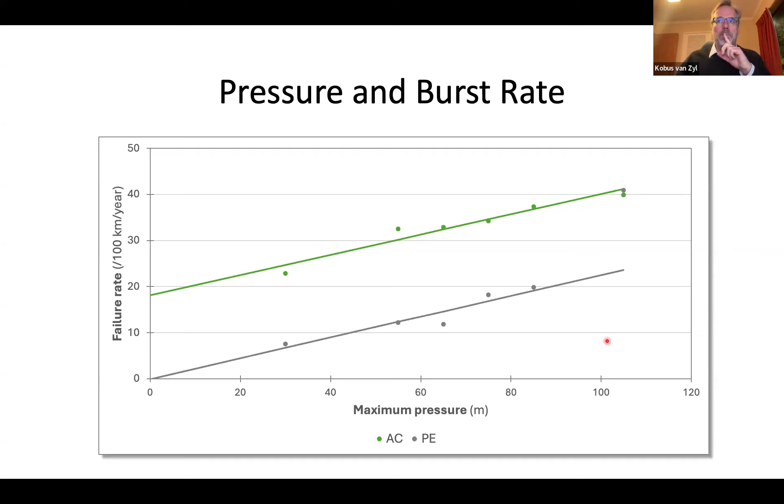Now, the behavior when you do pressure management is somewhat different. And this is Allan's model for pressure management. And this is the model described there. It says that you've got pressure independent bursts that you have to subtract. And then there's pressure dependent burst, and those burst as a function of the pressure to the power 3. So cubic function of pressure, very strong function of pressure.

And so if we take for instance, the AC relationship for Auckland there, and we say, let's start with a pressure of 110 meters there, or 100 meters, and we have a burst rate of 40 failures per 100 kilometers per year. And then we reduce that pressure to 50 meters. If it's a steady state, the burst rate would drop to 30 failures per 100 kilometers per year. But if it's a pressure managed zone, according to the model, the burst rate will drop to about 20 failures per 100 kilometers a year.

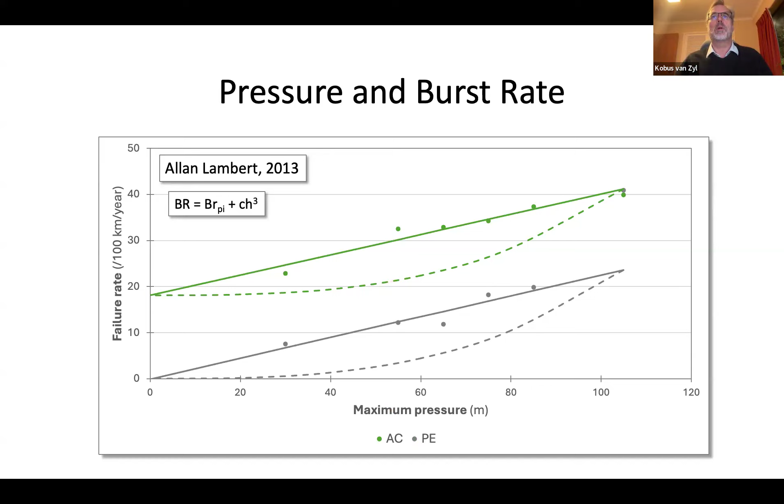And the question that we started this exploration of is, why does that difference? What causes this not to be the same? I'm going to try and give a part answer through the work that we've done.

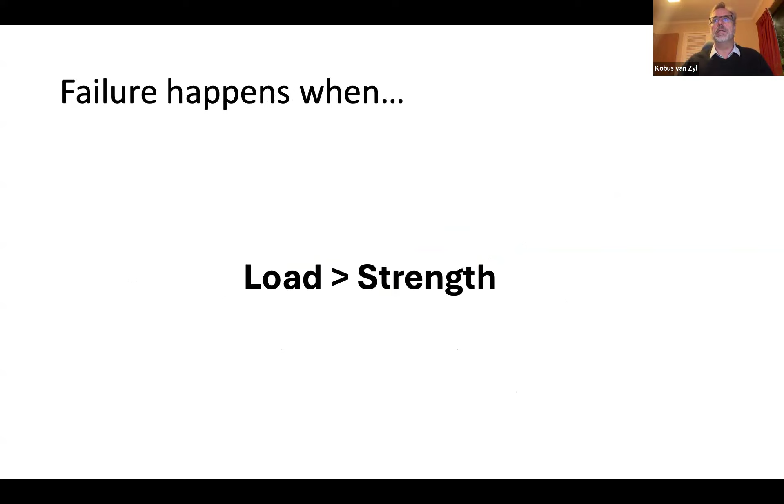So first, I'm going to talk about how failures happen. So failure happens in any structure, like a pipe, when the load exceeds the strength. The load on a pipe can be external, and there are various external loads, but there's also, of course, the internal load, which is mainly pressure, and it's the combination of the two that will give the maximum load at any point.

The strength of a pipe is, firstly, not the same everywhere. So the pipe's not going to fail over the average length, it's going to fail at the weakest point. So that's what we're interested in.

And the second thing is that the pipe deteriorates over time, so the strength will reduce over time. So the loads vary, but also the strength deteriorates over time. So we're trying to understand those processes.

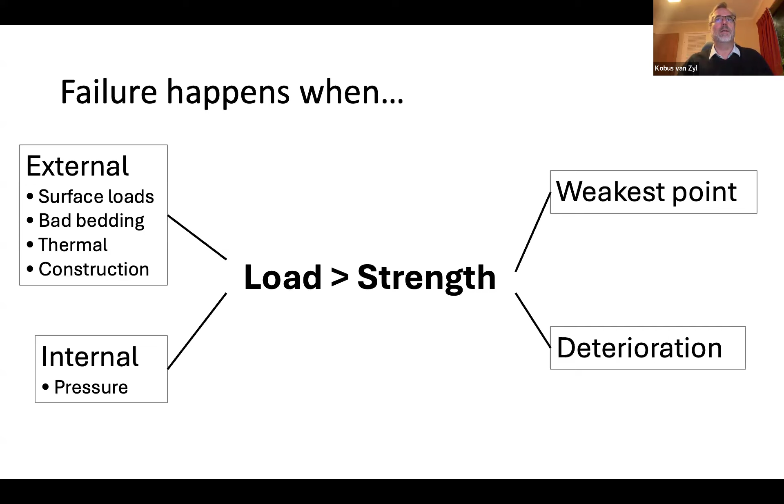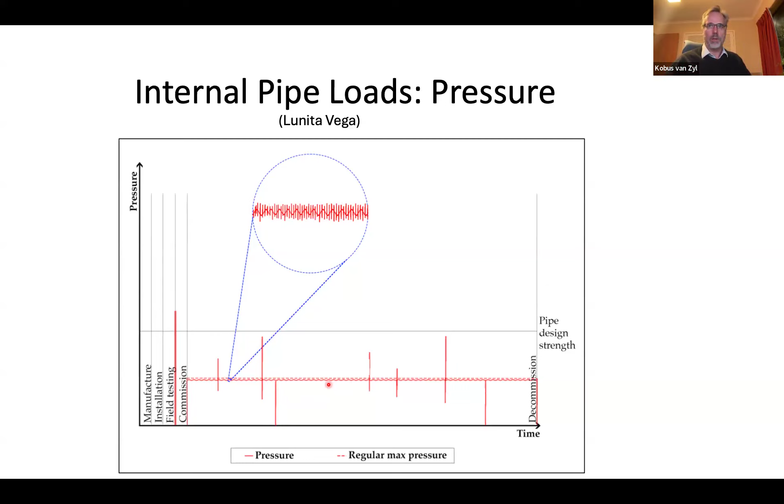Just look at the internal pipe loads, and that's pressure. This diagram shows over the life of a pipe that you've got variations. There's field testing initially that's quite high pressure, and then you've got seasonal variations, diurnal variations, background pressure fluctuations, transient noise, and big transients as well. And you've got periods where you empty the pipe, reduce the pressure to zero, maybe for repairs. So these are the loads that a pipe is subjected to internally, and it varies.

If we look at the pipe strength, this diagram represents, if you take all the points on the outside of a pipe, you'd expect a normal distribution for the strength. But this indicates that there may be a couple of points on the pipe that are weaker than general, and that may be because there's a manufacturing defect or it's been damaged during construction. This is important because this is where the pipe's going to fail when you pressurize it.

So we have weak points on the pipe, and then we have deterioration mechanisms that disproportionately work on these weak points because they already have more surface area. Maybe there's stress intensification happening. So we've got the weak point, and then deterioration at some point over time.

The weak point will start to leak, it'll breach the wall, and then we have what we call a background leak. It's leaking, but it's too small to be detected. That background leak will continue to deteriorate and grow until we get to about 250 liters an hour, which I'm calling a potentially discoverable leak. So the leak is now big enough that you can discover it if you go and look for it, but you don't necessarily look for it at the time. So it's going to continue to grow until it becomes discoverable, and then it's discovered - it becomes obvious that there's a leak from pressure or water appearing above the surface.

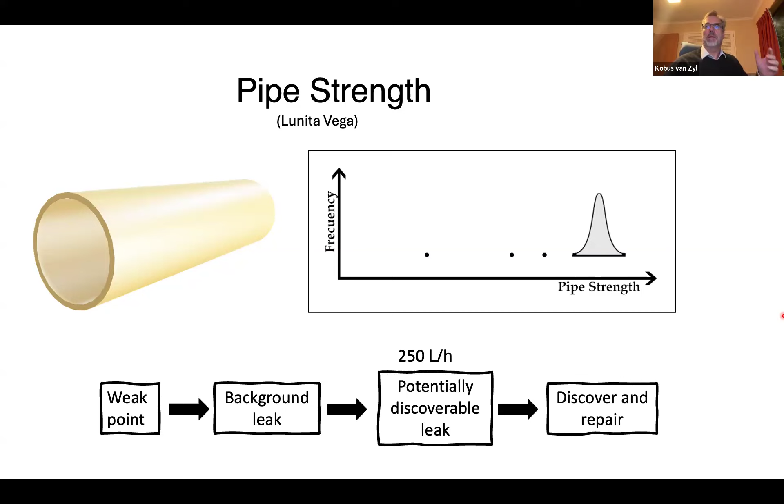So there are two aspects that I want to talk about. One is the deterioration mechanisms - I want to explain and show what they are. The other is the leakage flow rate, because the flow rate is one of the main mechanisms that makes a leak discoverable. And I'm particularly interested in how pressure affects the deterioration and failure flow rate of pipes.

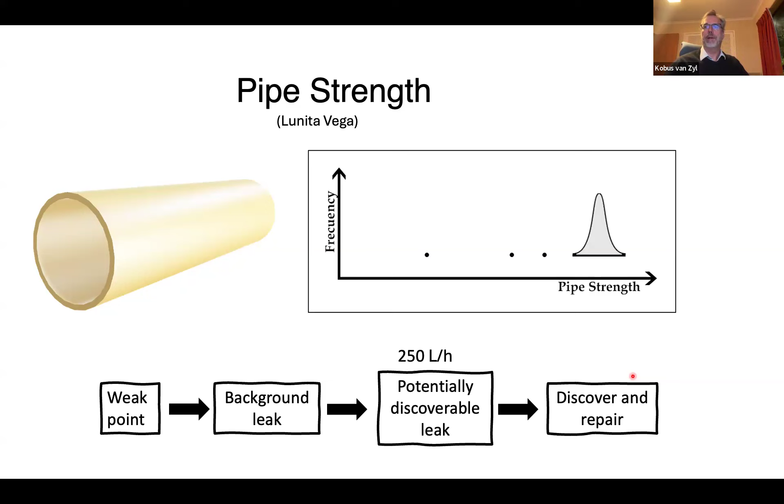So the first deterioration mechanism is corrosion. There are different types, and I'm throwing out the equations here, but it's really just to point out certain things. What I want to show is that the deterioration is a function of time in that equation. Pressure doesn't play a role, although you might think it could have a bit of an influence.

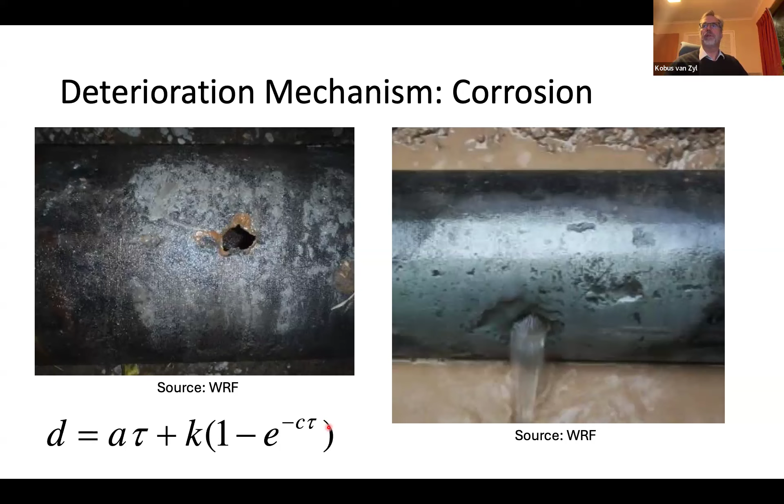The second mechanism is what I call soil erosion, and this is something we discovered in our experimental work at University of Cape Town.

And where you have a leak - now I lost my, oh, there we go, I think that'll work. No, it doesn't work, sorry, I'm trying to play the video but I'm not sure if I will be able to. No, because I changed the cursor and I don't know how to turn off the laser pointer. How do I do that? Great question. Let's see if... oh yeah, you maybe click on laser pointer, pointer options... no, that's not it, no.

So let me just explain what's happening here. This is a leak we created in a box with a glass side, and what we use there is glass beads, uniform glass beads as a soil medium. What you have is local fluidization happening in the soil, which is an interesting problem in itself - how does this happen, how does it operate? But the interesting thing for pipe deterioration is that you get scouring of the pipe by soil particles. They're picked up at the bottom here, transported to the top, and then they move around and scour across the surface of the pipe.

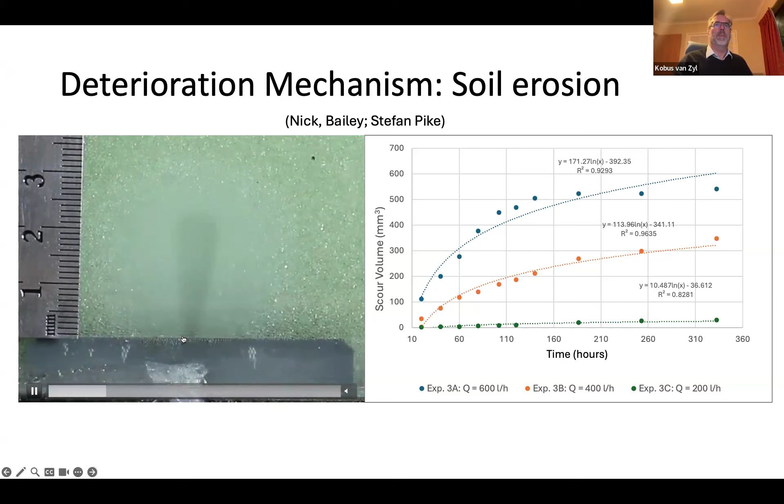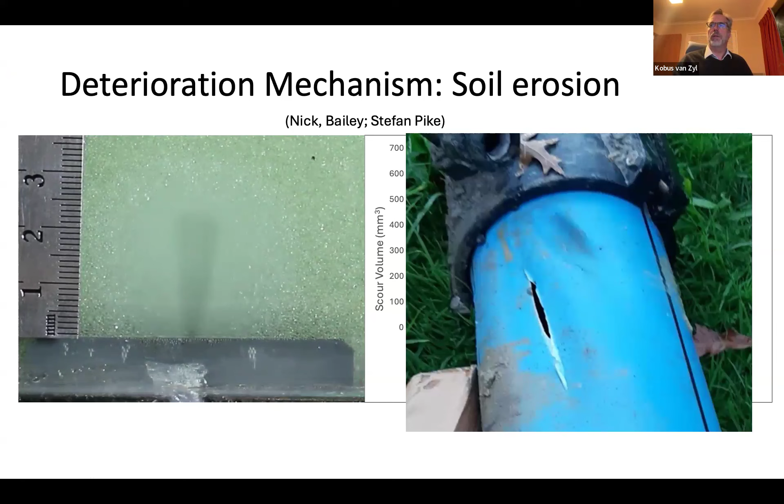So there you see the movement of the sand particles, the local fluidization, and the scouring of the surface of the pipe there. And this, you see this on pipes from the field. This is a collar that had a leak at the seal, and you can see the hole that it's scoured there. This is affected by pressure, because pressure affects the flow rate, and that drives this mechanism.

The third deterioration mechanism is fatigue cracking, and this is a PVC pipe from the Netherlands that has a longitudinal crack, and you're seeing the inside of the crack walls. There's a weak inclusion there that created this, and what you can see are these lines, and they indicate points where the crack length was. So the crack didn't happen all at once; it grew slowly over time until it was long enough to really break.

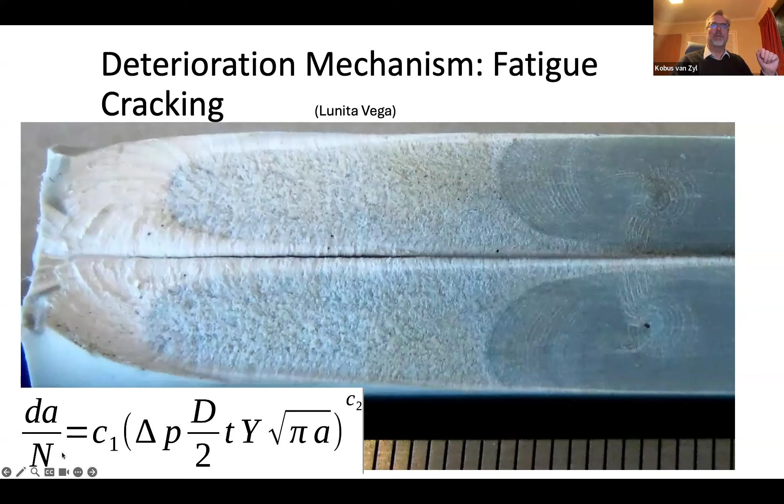This is interesting because the length of the crack, which is A, is not a function of pressure, but it is a function of the change in pressure. So the pressure variations and the number of cycles drive this process. Then finally, at some point, based on the length of the crack and the pressure, you get a complete catastrophic failure that you see there. We used a hydraulic balloon to pressurize it, just to illustrate that process.

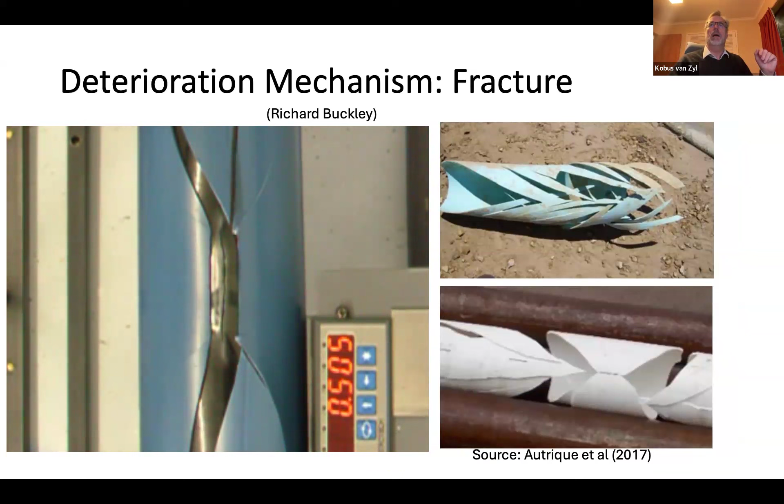So those are the mechanisms. Then when we look at the area of a crack or a leak, we also know that area varies with pressure, and it varies linearly with pressure. This diagram shows, I'll come back to the picture in a moment, the area of a round hole with pressure. You can see round holes are completely stable, they don't change, so they act like orifices. The same behavior occurs with small diameter steel pipe or metal pipes.

These are longitudinal cracks, and they vary greatly with pressure. The crack opens up if you increase the pressure, so the area increases. The green there is circumferential cracks; they slightly decrease in area, but depending on different conditions, they can also increase. What you see is that they're all linear functions of pressure.

This equipment was to look at what happens under negative pressure, so we increased the pressure on the outside of the pipe. What you see on these curves is when we go to negative pressure, the area line actually continues. So a longitudinal crack will open with increasing pressure, but if you have a negative pressure, it'll decrease the area of that crack. We understand this process quite well, and we can predict for a given pipe what the slope of that line will be.

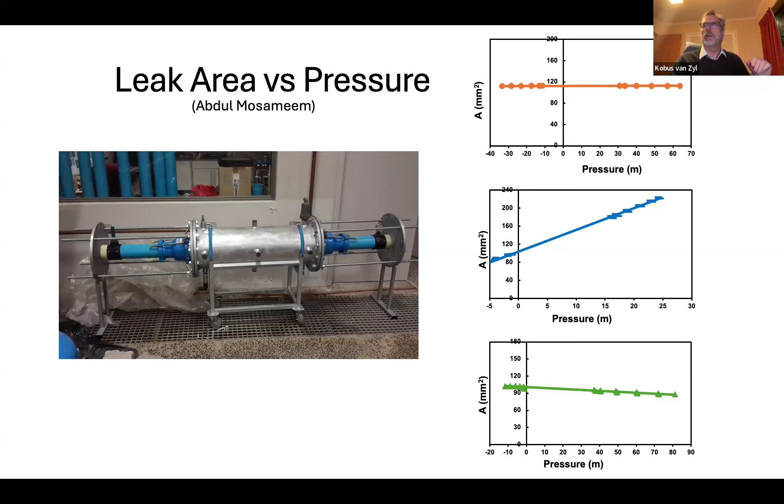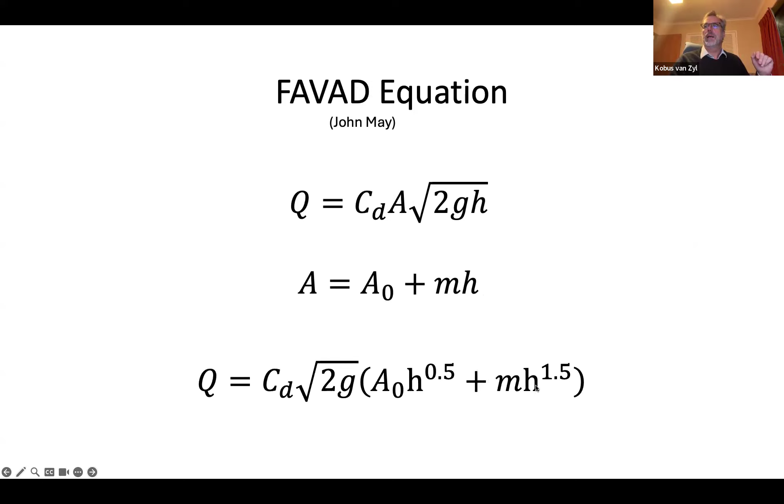That brings us to the FAVAD equation, which all of you will have heard about or know. John May famously introduced that. This is the orifice equation, which describes the leak: the flow rate through an orifice is a function of the square root of the pressure, times the area. But if the area is not fixed, but is a linear function, an initial area plus the slope, which we call the head area slope, times the pressure, then we get to the FAVAD equation. This has two terms, h, the pressure to the power 0.5, and a pressure to the power 1.5. This is what John May pointed out, and it explains why the N1 leakage exponent can be between 0.5 and 1.5. This applies to individual leaks, and with our understanding of material science, we can actually predict for a given leak what M will be.

But it also applies to a network or a DMA with many leaks. So if you apply it to a DMA instead of to N1, you can get the total initial area of all the leaks, and the total head-area slope of all the leaks, which I think we should be using more because it's a physical value linked to it, and they're constant.

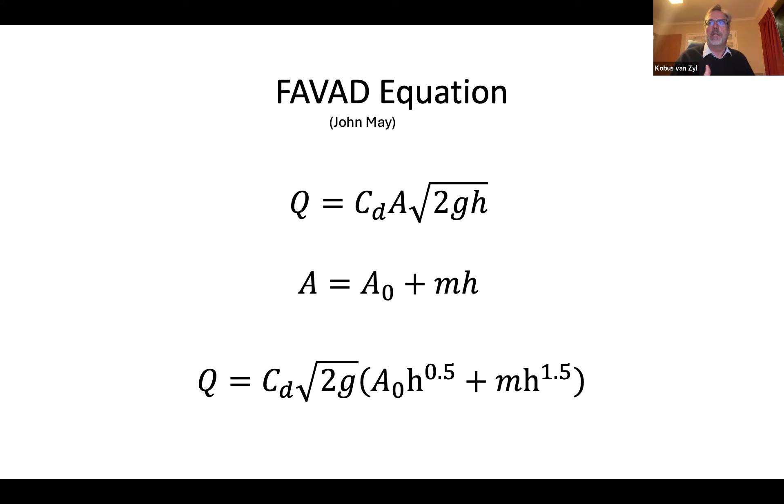But anyway, this is the FAVAD equation of flow rate. It's important because the flow rate determines when you can find a leak. So if you have a longitudinal crack that opens up with pressure, you're going to find that crack at a lower pressure than you would a round hole with the same area.

So now I want to move on to a model that I developed with one of my students, Lunita Vega, on how we model this process of age and pressure. And this is a graph, I'll explain what it means. It's a little confusing, but this is failure rate per kilometer per year.

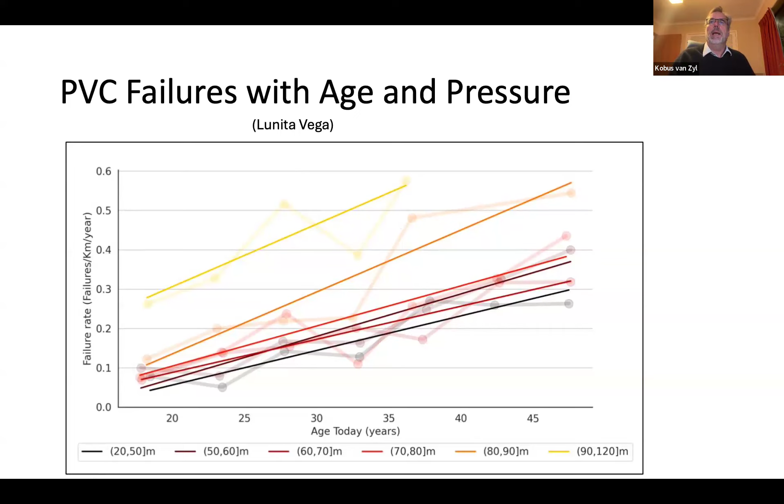This is the age of pipes, and each of these lines represents a different pressure range. This is for PVC, from our data in Auckland. So what the data shows is that the lower pressure pipes have the lowest slope there. And as you increase the pressure, the slope actually increases. That's the general trend: the failure rate increases, but the slope also seems to increase a bit. So we said, okay, let's model this process.

So that's what we did: plot pipe age against pressure on this axis. The 32 there is because the average PVC pipe in Auckland was 32 years old. So we said, from the data, if the pressure is 70 meters, we know there'll be 5 failures — those dots represent 1, 2, 3, 4, 5 failures in that year for a typical DMA. But if the pressure is 55 meters, there'll only be 4 failures in that same year.

We also know that this failure rate will increase with time, so we can model this over more years. Although it looks like these dots are equally distant, actually they increase. So there are four dots in that year, but if you move further there's 1, 2, 3, 4, 5 dots in that year — so the failure rate increases.

And then we said, what we think is happening is that a failure that'll happen at 70 meters will only happen later at 55 meters, because it needs more time to deteriorate more. It has to grow to a bigger size — a longer crack, a bigger hole — before it reaches the flow rate required to be detectable at 55 meters.

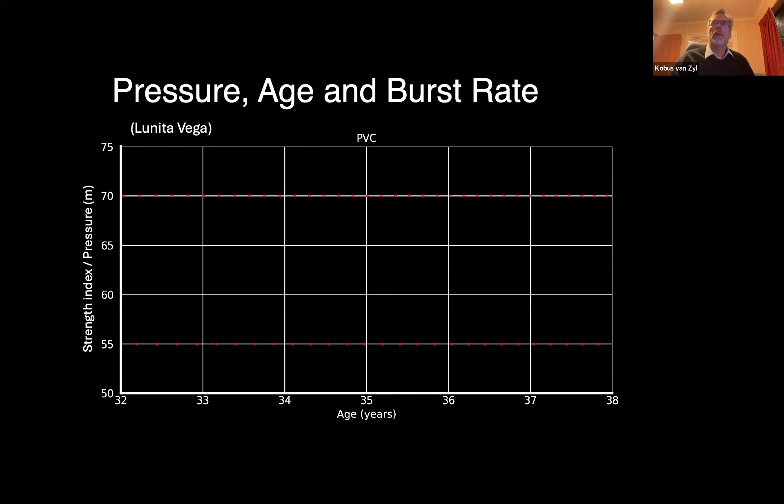And so we drew these lines. Now, each of these lines represents an individual leak in a DMA, and when the line crosses the pressure in the system, that leak becomes discoverable. So what this shows is that this leak was discoverable at year 32 at 70 meters.

But if the pressure is 55 meters, it needs to grow the crack or develop the hole, so it's going to take more time — maybe 2 or 3 years later we will discover it at 55 meters. So this was our conceptual model for leakage.

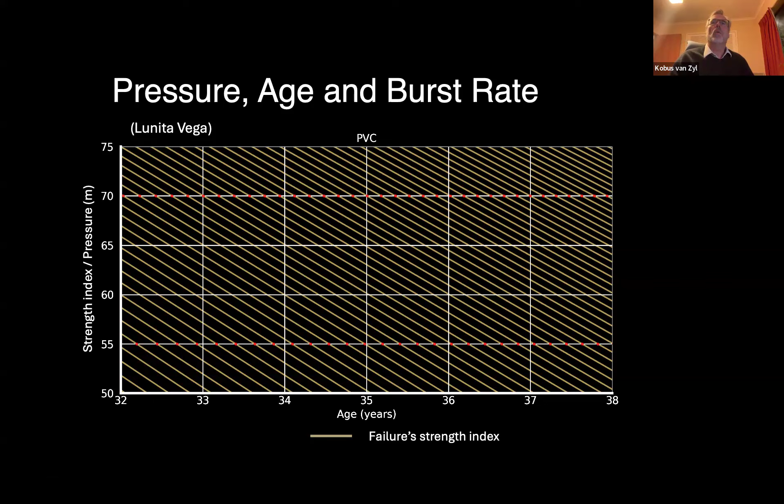And then what we could do was model a pressure management implementation. So we said, okay, let's keep the pressure at 70 meters and then drop it to 55 meters, and then see what's going to happen with our burst rate. The burst happens whenever one of these lines interacts with or intercepts the pressure line — that's when you get a discoverable leak.

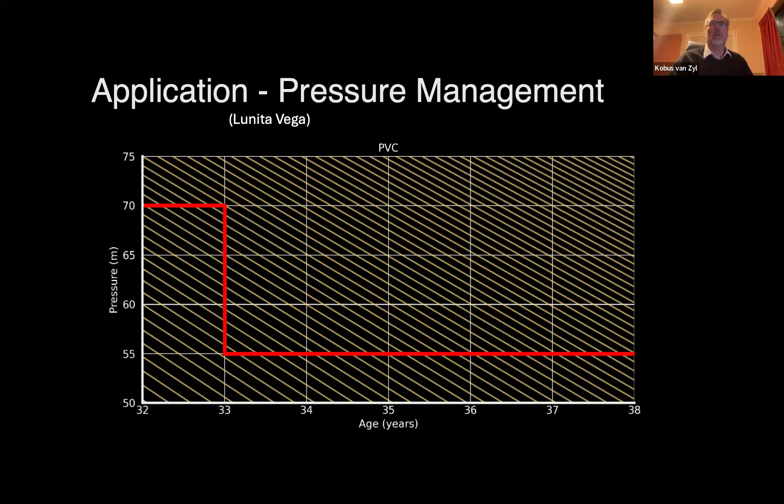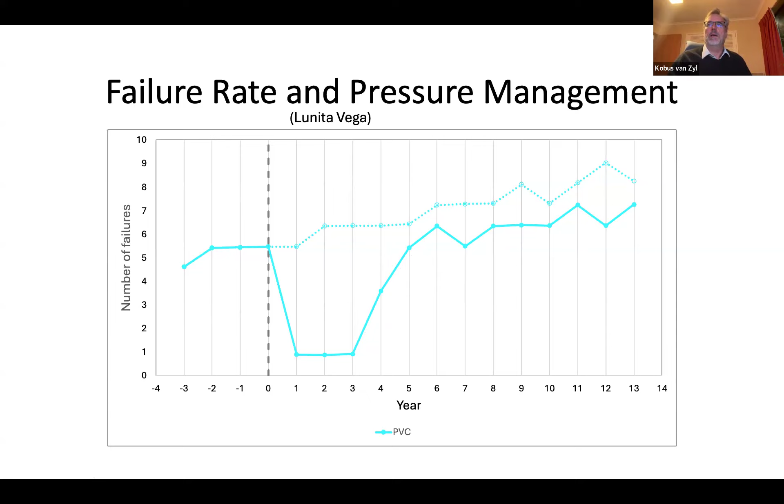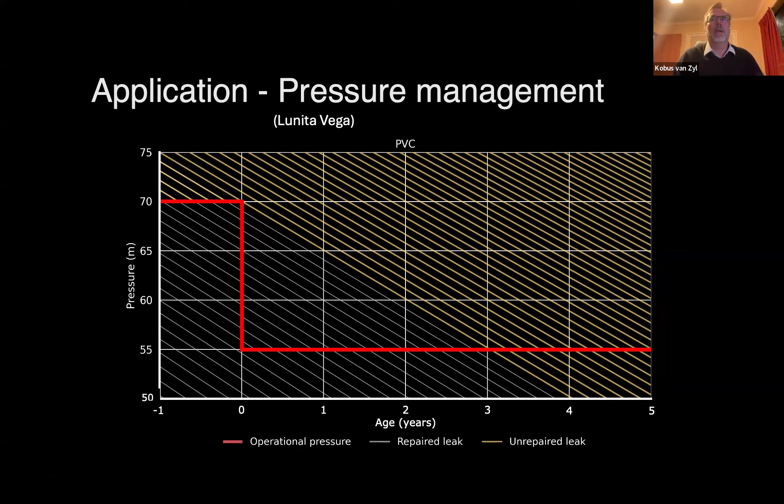This looks really interesting. Just to explain why this happens from our model: this weak point, or small leak, was discovered at 70 meters and repaired. If it wasn't discovered, it would have continued to weaken and been discovered 2 years later at 55 meters. But because we found it at 70 meters and repaired it, we're not going to find that leak at 55 meters. So there's this shadow period where the pressure reduction means there aren't really weak points, and there's a time before pipes start to fail again. We were looking, and we're still looking, for evidence of this behavior because the model is just giving us a conceptual idea, but we'd like to verify it with real data.

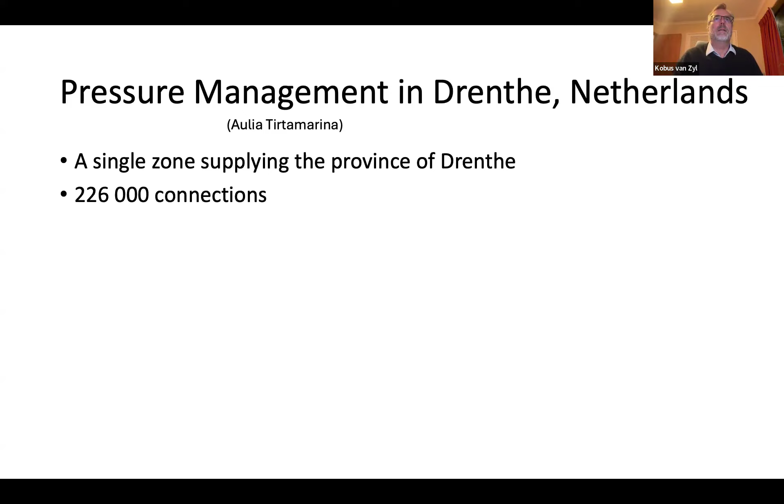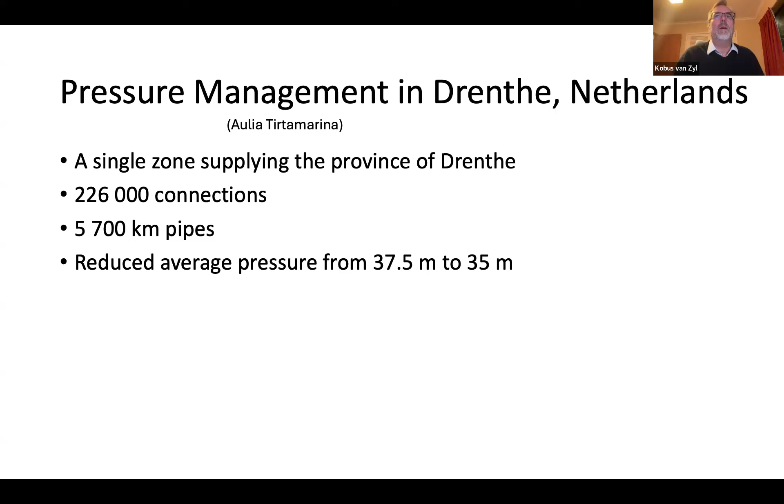Now, this still isn't enough evidence that this behavior is really happening, so we are looking for more evidence of pressure management and failure rate. We're just using average failure rate over a year, so we're not looking at seasonal effects. But if anybody has data available that we could analyze, to see if we find the same behavior in that data, it'll be wonderful.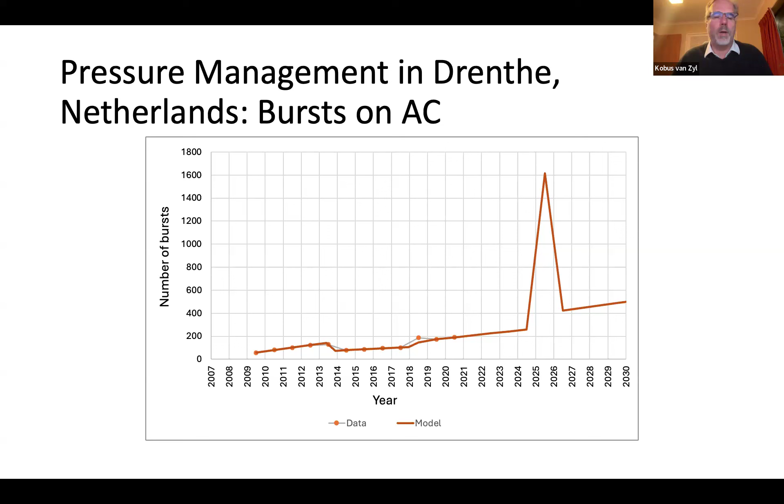I suggested to Drenthe that they please do that, because I'd very much like the data to calibrate the model with, and they have been somewhat reluctant to do that. So that's everything I've got.

Thank you, Joseph. No worries, that was great.

Thanks for that, Kobus. So just to be clear, you are reaching out to utilities now to try and get data to validate and calibrate your model. That's one of the things, absolutely. If anybody's got data, maybe on different pipe materials, maybe a couple of years before pressure management and then at least 5 years post pressure management implementation, we would be very happy to analyze the data, try our models, and report back to you, if we can use that data to further our research and better understand these processes. So if anybody's got data, please reach out to me, and I'll be very happy to see if we can analyze it for you.

So there was a question in the chat from Rashad. The question, does the pipes... okay, I think what he's asking is, is this applicable to different pipe materials? He talked about AC and PVC there, but is it... Yeah, short answer is yes, absolutely. We dug into, and found this behavior of pressure and burst rate for different materials in Auckland, and we fitted our model to the different materials based on what the calibration, or what the data, showed us. Different materials behave slightly differently; some had longer periods where the burst rate stayed down, and others shorter. But yeah, we did observe it with all four materials: AC, polyethylene, PVC, and cast iron.

Okay, great. I see Alan's gone off mute. Allan Lambert, don't know if you've got a question, but keep it quick, that'd be good, just because we need to leave some time for Edward.

Yes, excellent. Just to introduce Edward, Dr. Edward John from University of Sheffield has a PhD developed on understanding fundamental processes that cause cast iron water distribution pipes to develop leaks, and has done a lot of really cool experimental work in this area. So a nice lead on from Kobus. Go ahead, Edward.

Thank you, Joe. Hopefully this should follow on quite nicely from Kobus's talk, taking a bit more of a deeper dive into cast iron pipe fatigue failure mechanisms specifically. This work is basically a summary of my PhD, which I completed last year at the University of Sheffield, sponsored by Auckland.

So there we go. Okay, basically the aim of this work was to understand the process shown in this video - what enables water to leave through a crack formed in the wall of a cast iron pipe, creating a leak. So it was quite an experiment-heavy investigation. We were really looking to try and understand the failure mechanisms behind this process.

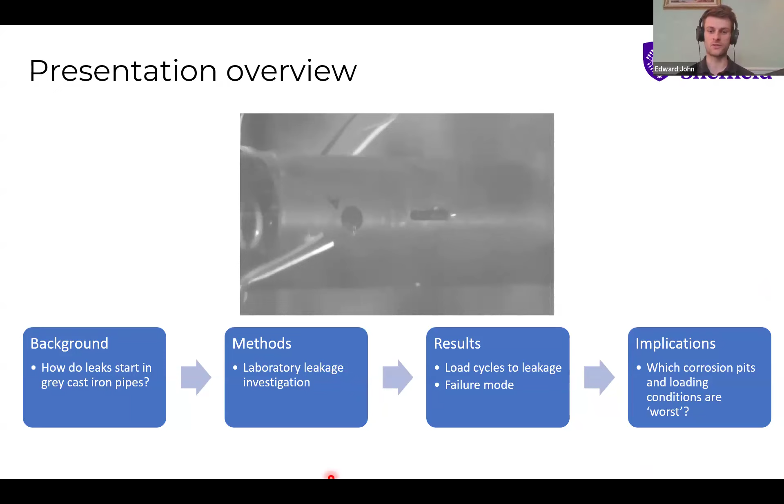As a quick overview of the presentation: a quick bit of background about the theory of how leaks start in grey cast iron pipes - probably a little overlap with what Kobus has talked about. A quick overview of the methods we used, our laboratory tests to cause these pipes to start leaking, and then the results - what these tell us about which types of corrosion pits are most damaging, which types of loads are most damaging, and how these failures behave. So as I've already mentioned, this work focused on grey cast iron pipes.

This work was informed quite heavily by the UK context, where cast iron water pipes are still the most common water pipe material in the UK. The most recent version of the National Mains Failure Database shows that about 38% of pipes by length are cast iron, so they're important for us to understand and work with, despite their age.

An important thing to understand about these pipes is that they're particularly vulnerable to corrosion and the formation of deep localized corrosion pits, and they're also very brittle, so they tend to crack rather than yield like a steel pipe might. One cause of both attributes is their graphitic microstructure. This image at 100 times magnification shows the very small flakes of graphite within the microstructure of these pipes. These act like pre-cracks almost, enabling brittle behavior—we'll come back to the importance of those a little later.

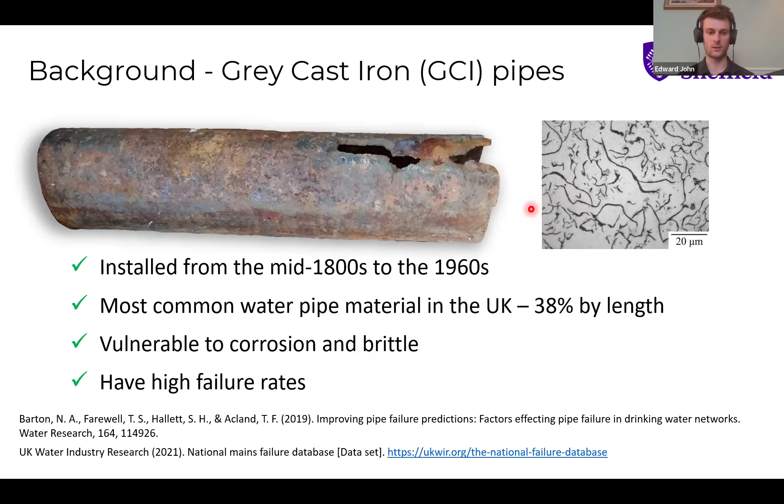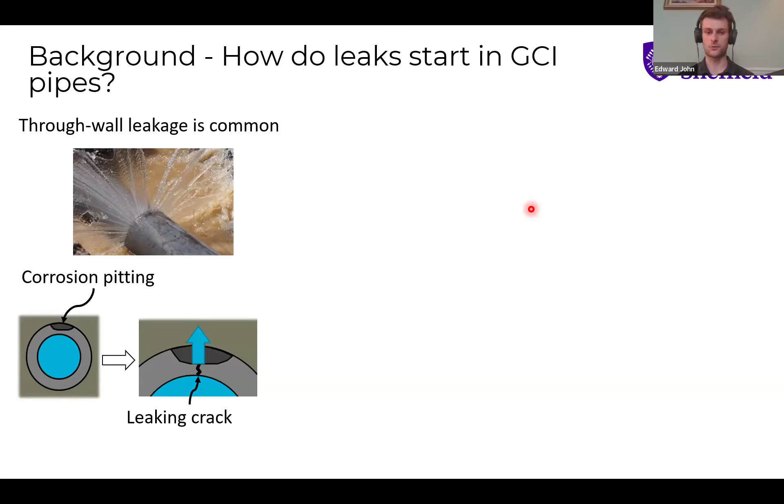Looking at cast iron pipes, what's the theoretical understanding of how these leaks start? We know that through-wall leakage is a common way leaks form in these pipes and ultimately cause failure. The idea is that you have corrosion pitting, which effectively removes the original metal, creating weak points in the pipe and stress concentrations.

Then under service loading, cracks can form at the base of these pits that enable water loss and leakage. These cracks are caused by the stress experienced by the pipe, and the stresses are caused by the loads applied to it. Kobus has given us a nice overview of these. Two I wanted to mention specifically were internal water pressure loading, which effectively all pipes experience, and this tends to create stress acting circumferentially around the pipe, in the hoop direction.

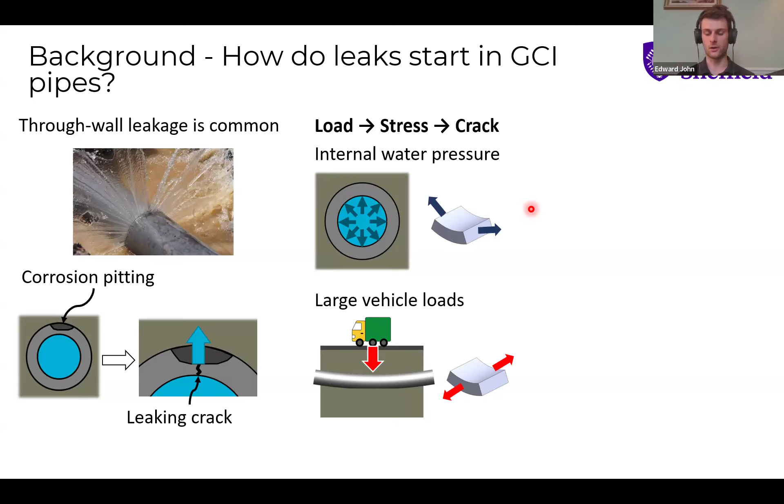Another particularly interesting one is large vehicle loads. For smaller pipes, these can cause bending loads, mainly causing stresses acting in the axial direction, along the pipe. Both of these loads can cycle multiple times per day, creating the possibility of fatigue cracks forming—a crack that forms gradually over time rather than in a single sudden overload.

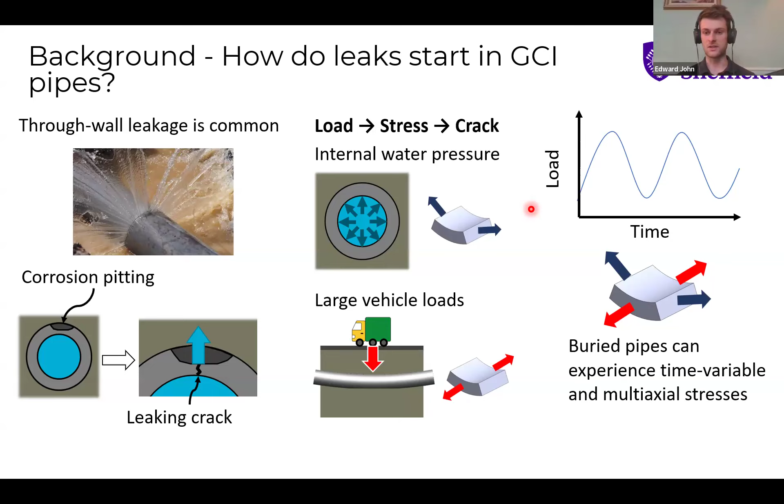When we consider the complex loading these pipes can experience, we have the problem of stresses acting in different directions, so we could have quite complicated stress fields. The trouble is we don't really understand fully how cast iron pipes respond to localized corrosion pits in terms of how damaging a particular pit is, and we don't understand how they respond to these complicated multi-directional stress fields.

Coming back to the practical side, when performing pipe condition assessment, we might want to know which pipes are at the most risk of failing. We could potentially figure this out by looking at combinations of corrosion pits and loads the pipe experiences, to try and figure out the worst case scenarios. We need to determine how we can assess this and what information we need about a pipe to judge which is most at risk, to replace it before it fails and stop leakage occurring in the first place.

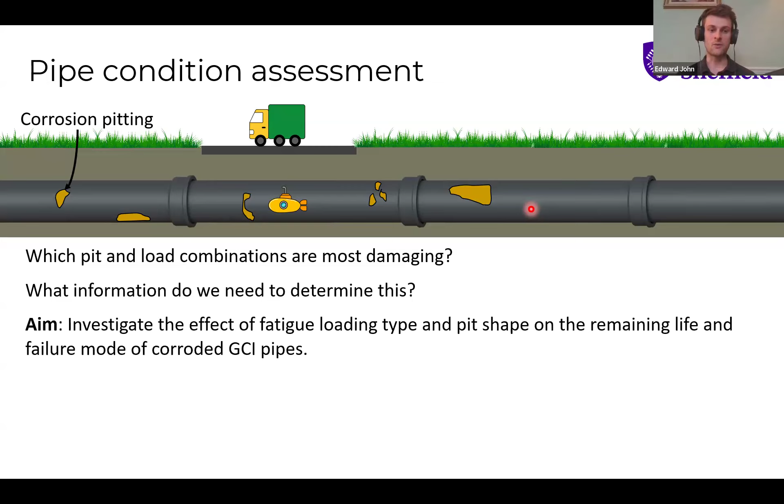So the aim of this work was to investigate the effect of the fatigue loading type and the pit shape on the remaining life and the failure mode of corroded cast iron pipes.

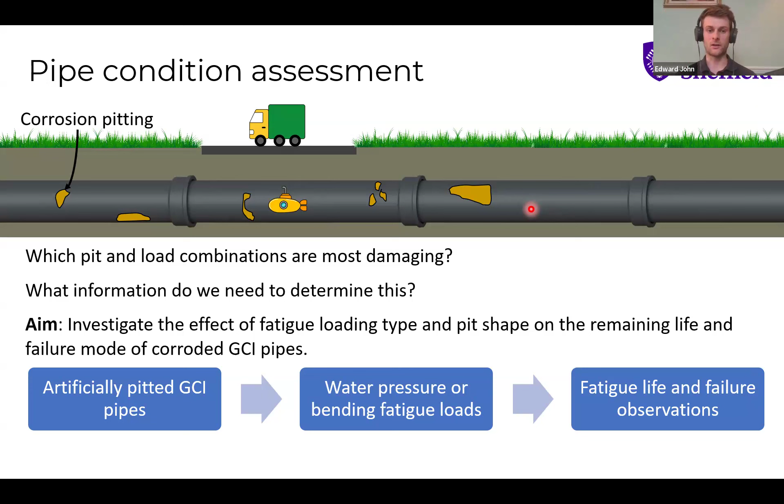The method we used was to take uncorroded cast iron pipes, artificially add pits so we could do that in a controlled manner, then apply either water pressure or bending fatigue loads—loads that cycle over time rather than being constant. We then looked at how long the pipe survived, how many load cycles it took to cause the leak to start, and what the nature of the failure was, to shed light on this process.

I won't go into this in too much detail now, but an initial piece of work we had to do was figure out how we could get a lot of pipes to test that were all very similar, because in practice these pipes vary hugely, and if you dig them out of the ground they come out in horrible states of corrosion, which we didn't want to deal with because we had our work cut out trying to understand the fatigue process anyway.

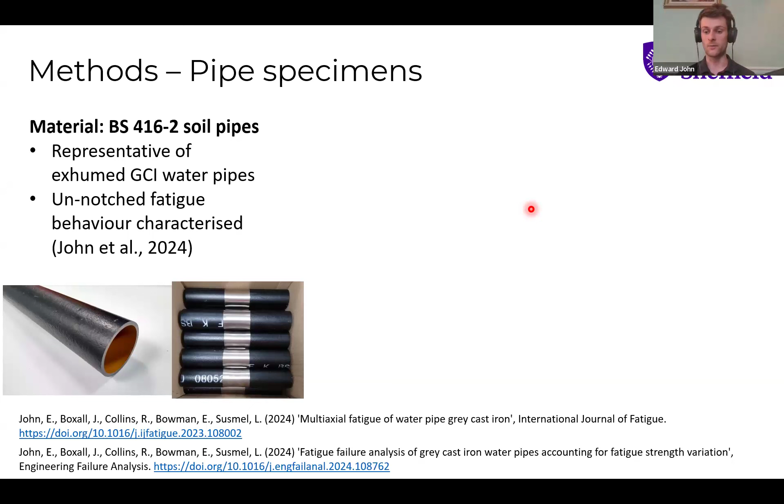So basically what we did was we were able to get some cast iron drain pipes that were produced in a very similar way to how pipes used to be produced. We did a series of tests and were able to show that they had very similar tensile and fatigue properties to the water pipes we dig out of the ground, so we use these as a kind of proxy for real water pipes in our investigations.

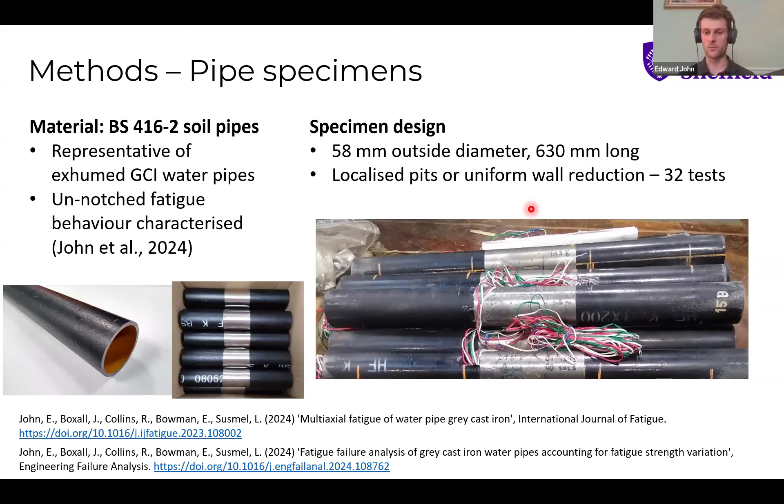So the pipes we tested were all about 2-inch in diameter, so a little bit smaller than pipes we see in the field. This scaling down doesn't really affect anything, because what matters is the stress that the pipes experience. If a larger pipe experienced the same stress, then the response would be the same.

So we added a series of different sizes and shapes of artificial pits to the pipe. There's been some previous research that's shown that the residual strength of the corrosion product is effectively negligible compared to the steel, the iron, sorry. So we could replicate these pits by just removing iron through a machining process.

So we looked at a uniform wall loss - this was basically just a turned down piece of pipe. We added a sharp sort of circular pit, so that had a 0.1 millimeter root radius, so very, very pointy. And also a blunt pit with a 4 millimeter root radius, so that was more of a bowl shape. And then finally, an axial pit.

This was the same sharpness as the sharp pit, but kind of extended along the pipe, because we see some corrosion pits with this form. All of these pits penetrated about halfway through the pipe wall, so all we're varying here is just the shape of the pit, not the depth.

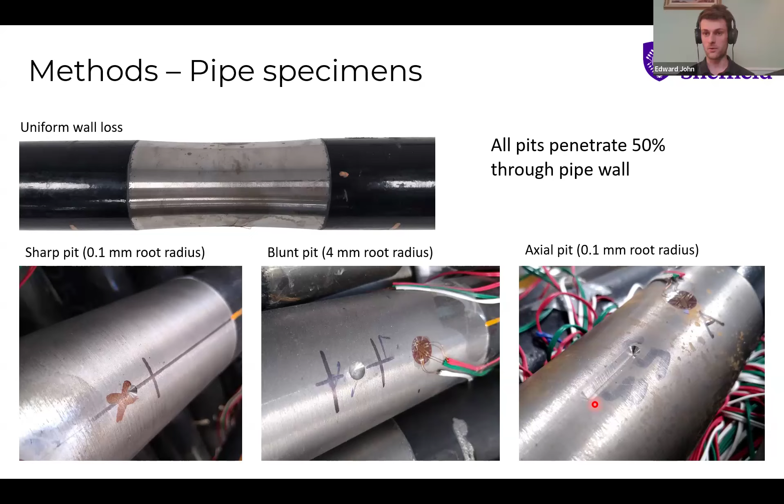And so the idea was to test these pits using different stress directions, basically. We achieved this through using bending loads to create axial stresses and internal pressure loads to create hoop stresses, enabling us to look at this biaxial stress condition.

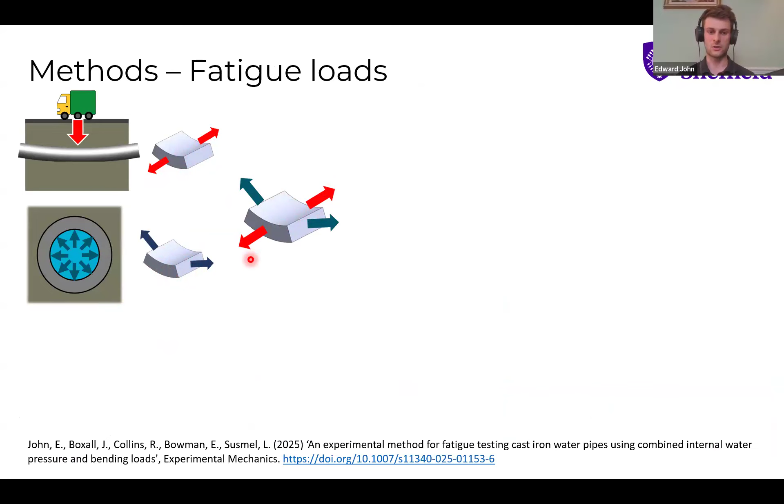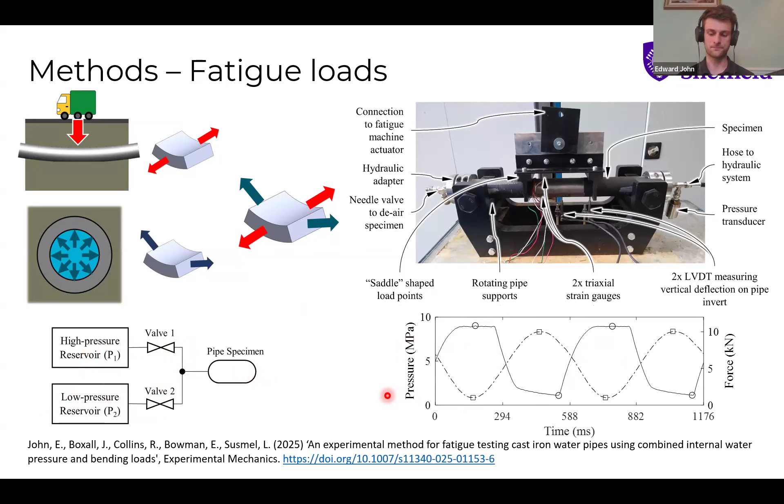So moving on now to look at some results from these tests. One of the things we did was use high-speed video recordings to kind of capture the failure process to see what happened, basically.

So this test shows one of the axial pits, and the only loading is internal water pressure. If you notice the pressure scale on the top, the pressure is quite a lot higher than we see in reality. This is just because the pit only goes halfway through the pipe wall - in reality, pits probably have to be 90% or deeper to cause high enough stresses. The reason we didn't do that is because manufacturing those pits consistently would have been very difficult. But what matters really is just the stress that the pipe experiences, which you could get through a deeper pit and a lower pressure.

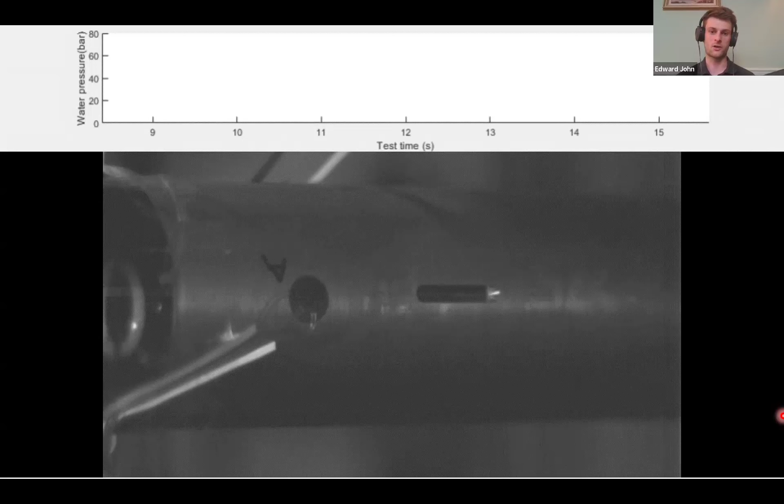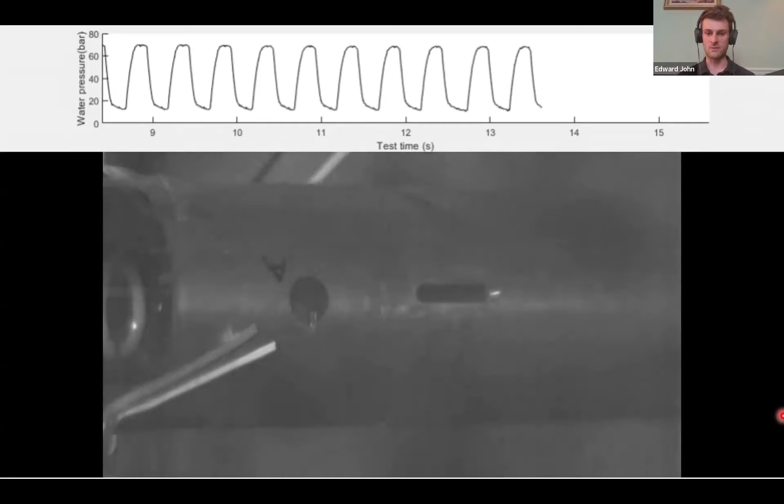So anyway, at the start of the video, there's no leak. The pressure is just cycling twice a second in these tests, and then suddenly we have a crack form at the base of the pit. This crack is basically taken up the whole length of this pit. Interestingly, it's only leaking during the higher pressure part of the cycle, and the pressure is always positive during these tests. Then after 10 cycles, the crack was able to propagate beyond the pit, and we basically have a burst.

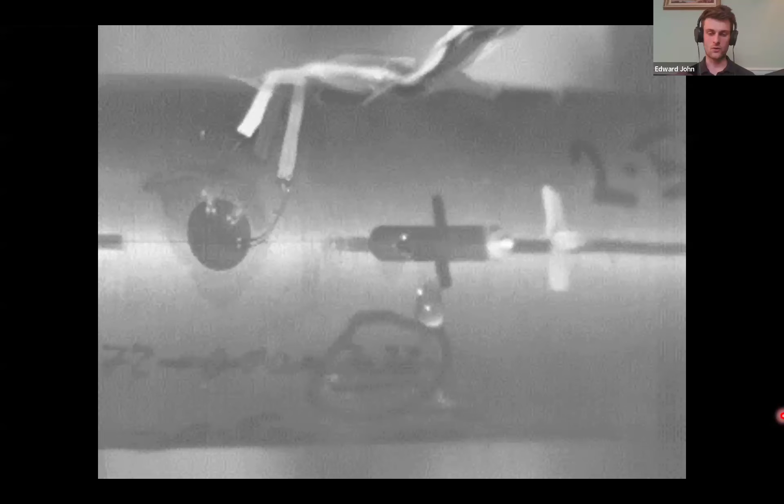So this next video basically shows the same arrangement, but the pressure is about 75% lower, or at least the amplitude of the pressure is 75% lower than the previous test. Instead of that kind of very vigorous water jet, it's basically the same process, but the initial crack is much smaller - we're basically just getting a kind of dribble of water coming out.

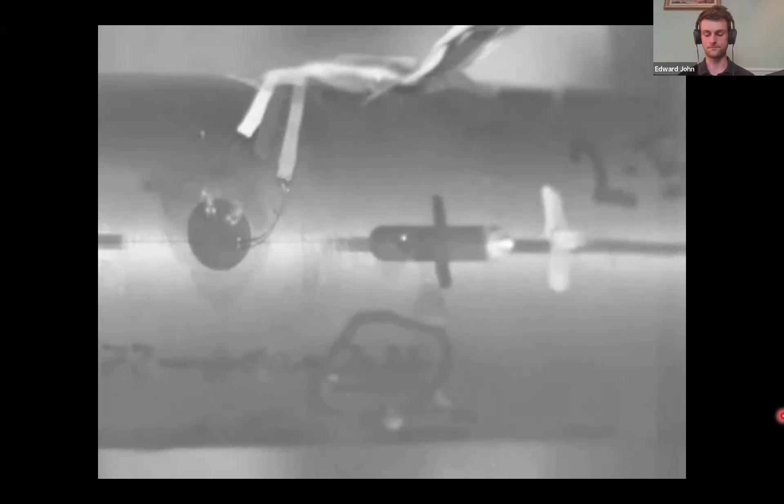And now let's look at a very different type of failure. This is a pipe with uniform wall loss, and the loading is alternate bending and then pressure, so it's out of phase loading.

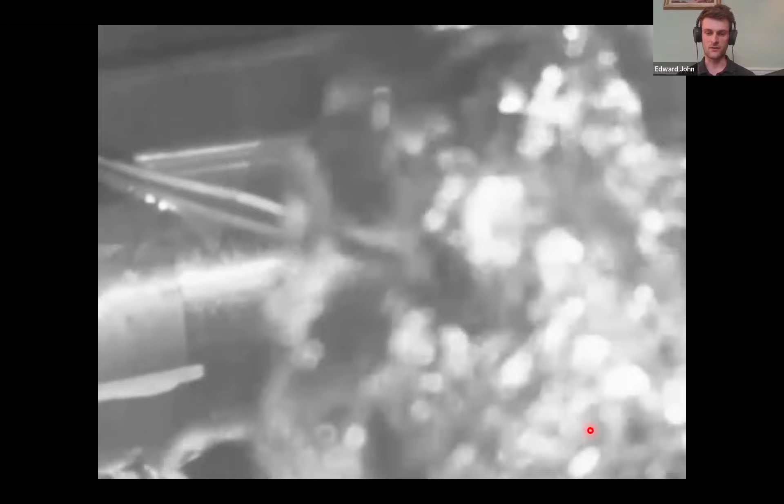It's not terribly clear, but where my pointer is, a crack has just started to form, and you can kind of see the wisps of water jet coming out of that crack. So much smaller than the crack in the initial video. Then the jet gets bigger and bigger, and we suddenly have a circumferential crack forming. That was about 9 load cycles between the crack appearing and the pipe effectively bursting.

So what can this tell us about fatigue crack leakage behavior? The first thing of interest is that the leak can start when the fatigue crack itself is only a few millimeters long. So very, very small cracks can cause leakage, although clearly this is very small and probably undetectable. But it's important to understand that as soon as we have a crack that spans the pipe wall, we begin to see some kind of water loss.

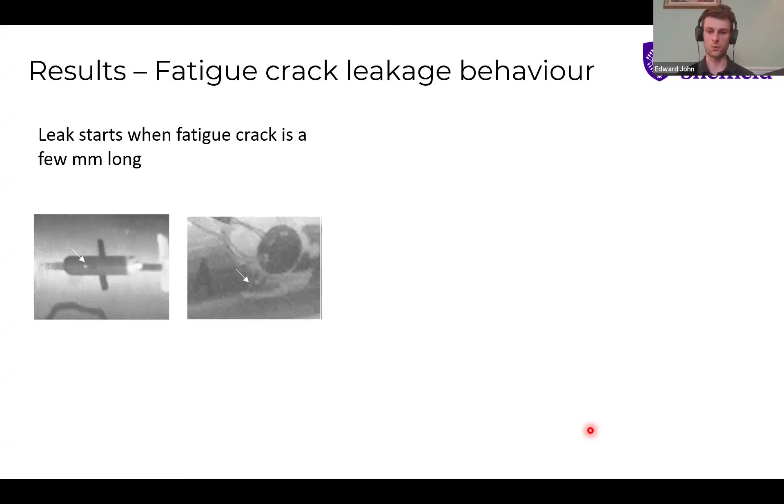However, water loss only occurs when you have some kind of load to hold that crack open. When these cracks are very small, they have zero width before any kind of corrosion can occur over a longer period of time to widen the crack. So unless the load that caused the crack to form is present, the crack will close and water can't escape. By going through these videos frame by frame and comparing them to the pressure, we found that it was about halfway through the increase in pressure in a cycle that the leakage started. So even when you've got a positive pressure, there's no leakage occurring.

This is quite interesting, and I guess provides something of an explanation for how you might calculate a negative initial leak area for a DMA. You could have lots of very small cracks that close as you reduce the pressure.

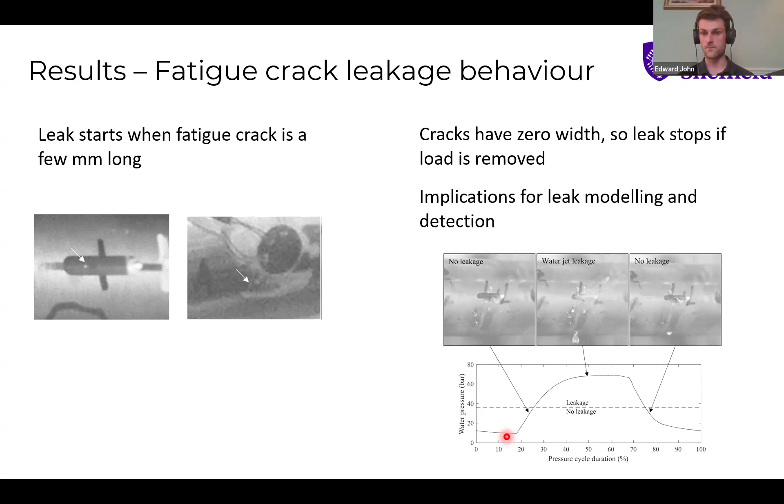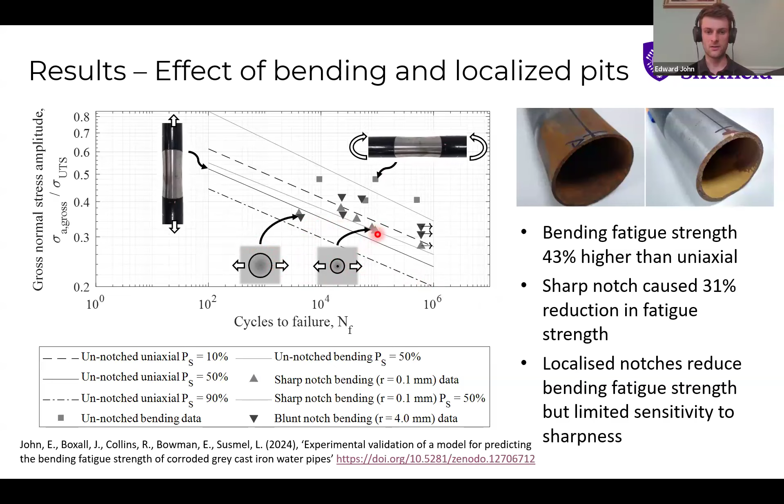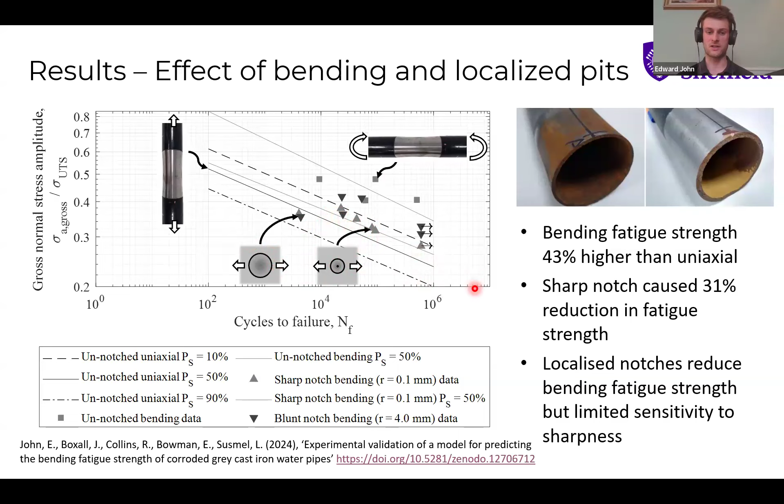But the interesting thing here is that there wasn't really much of a difference between the two shapes of pits. The upward pointing triangles are the sharp pits, and the downward pointing ones are the blunt ones, so very similar behavior for the two. This shows us that although the pipes are sensitive to the presence of pits, the actual sharpness of the pits doesn't have a huge impact. So in this case, just knowing the depth of the pit would be enough to assess how damaging it is.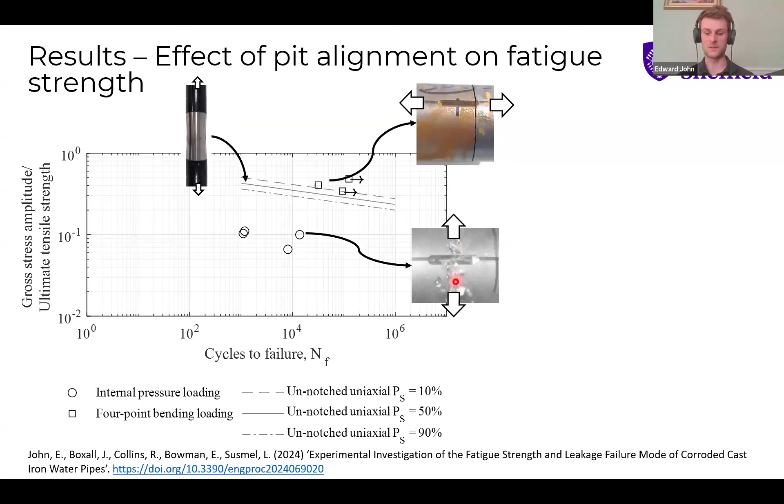Even when we account for the fact that bending loading is less damaging than pressure loading, rotating the stress through 90 degrees so it's perpendicular to the pit reduced the fatigue strength of the pipes by 60%. So the alignment of these pits can have a significant effect on the fatigue strength. In this case, just knowing the depth of the pit would not be enough to give a good estimate of how damaged it is.

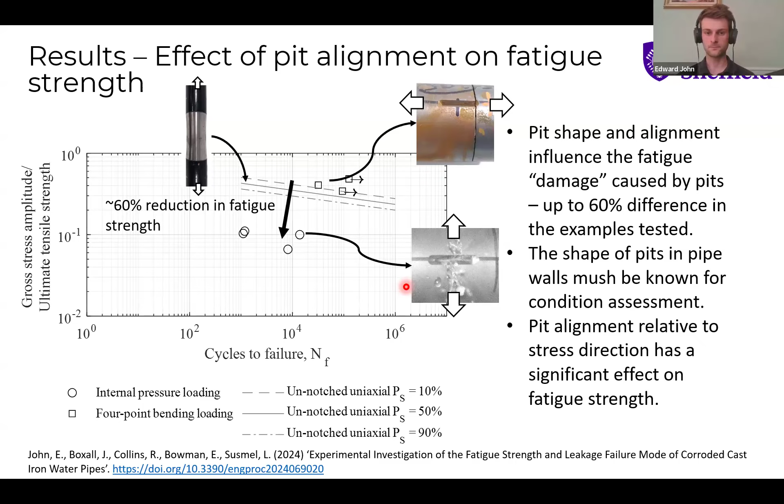We'd need to understand the shape and alignment of the pit, and also what type of stress the pipe's experiencing, to understand how damaging that pit is. So the next thing we set out to do is try to figure out, can we predict this behavior? We tried out quite a few different models, but I'm just showing the results of two here.

These basically show prediction plots. Along the bottom we've got the measured cycles to failure from the experiments, and on the left axis we've got the model predictions. The left-hand plot shows the net stress, which is basically the standard prediction you might do where you're assuming uniform wall loss to the depth of the pit. So even where you've got a localized pit, you just look at how much wall is remaining and assume that's the same all around the pipe.

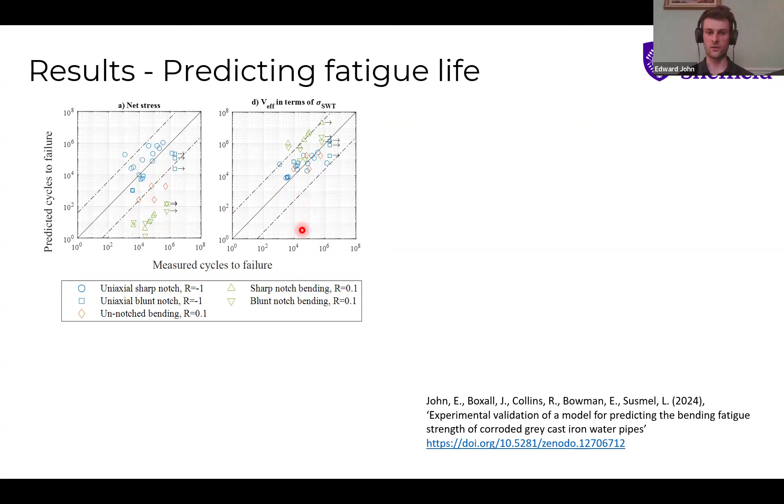On the right, we've got a model using a combination of two models: the Smith-Watson-Topper criterion to account for the effect of the complicated multi-axial stresses, and also the effective volume criterion to account for the effect of localized pits. This provided pretty good predictions. So we're onto something here of being able to predict this behavior and figure out which kinds of pits are the most damaging.

Just as an interesting side, the effective volume approach is basically looking at how much of the pipe volume experiences the highest stresses and uses a ratio of that to figure out what loading conditions are most damaging. Although this is an empirical approach, it's probably linked to the fact that we have all of these inclusions in the cast iron pipe material that act as initiation points of failures. So if we expose more pipe material to high stresses, we're more likely to find a worse graphite flake that can cause the failure to initiate.

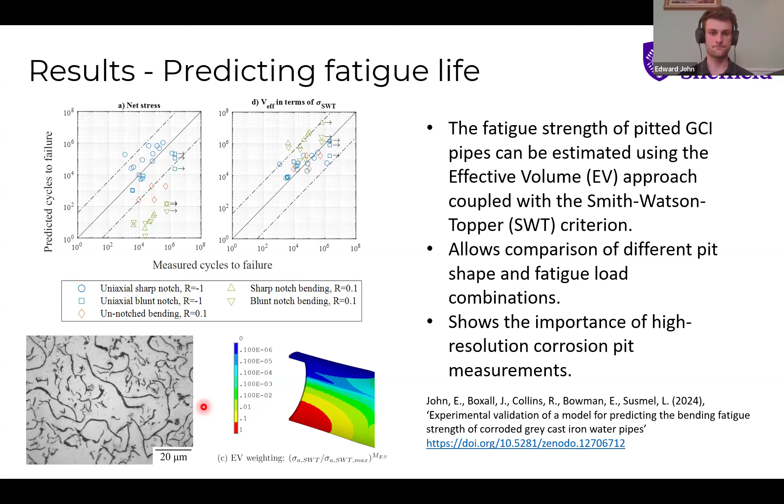In summary, using these models together allows you to predict how damaging a particular combination of pit shape and loading will be in a cast iron pipe. So moving now from predicting when a leak will begin, we're looking a bit now at what we found from once a leak is formed, and how it behaves, how it grows.

These show some fracture surfaces from uniaxial tests, so tension compression tests. What we noticed when we looked at the fracture surfaces is that they all showed a fairly clear, stable crack growth region. This was a bit like the PVC pipe that Kobus showed us earlier, where you have this area of the crack gradually growing until it gets too big and then is able to, in one load cycle, propagate all the way around the pipe.

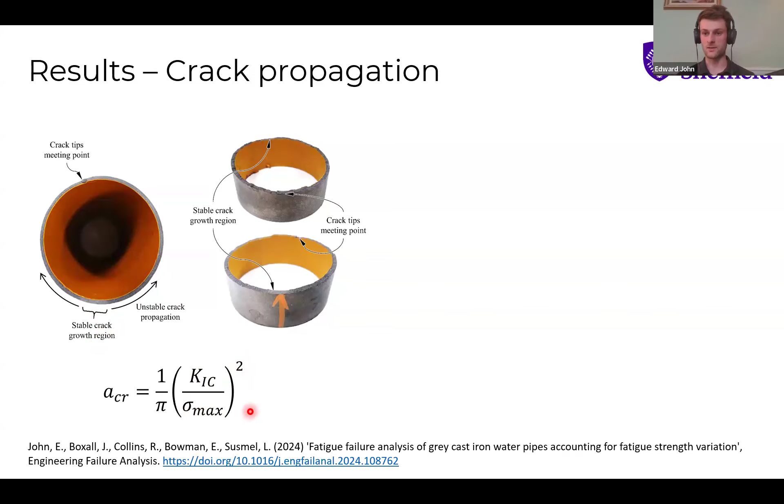According to classic fracture mechanics, we should be able to predict this stable crack growth region using the equation down here, which says that the length of that maximum crack size is a function of the fracture toughness and the maximum stress the pipe experiences. The crack grows by the variation in stress, but the idea is that the maximum size is limited by the maximum stress. From measuring all of these stable crack growth regions and plotting them against the predictions of this equation, we found generally a pretty good agreement.

There were a relatively large number of tests where we couldn't identify a stable crack growth region. This could just be that it wasn't clear when we looked at it under a microscope, but also these tests all tended to be those which failed a bit prematurely, so there might be something else going on there.

But basically what this shows us is that less aggressive loading conditions with lower maximum stresses allow for larger cracks to exist, which means that effectively you can have larger leaks forming before a pipe bursts.

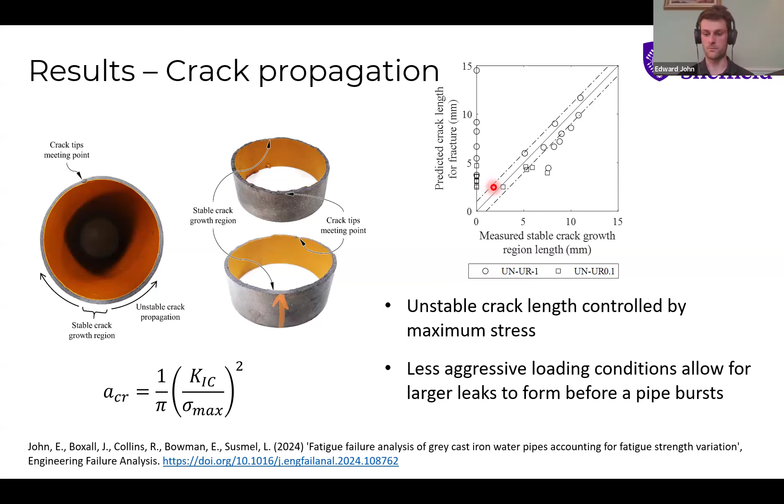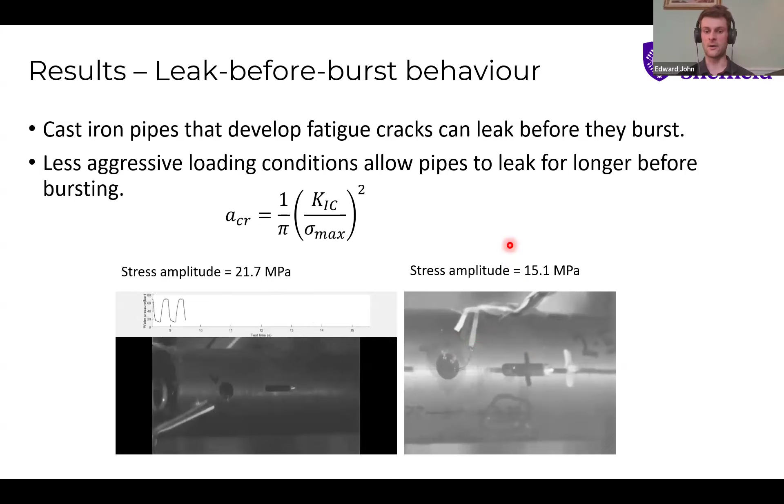Finally, expanding on this and comparing the two tests we showed videos for earlier, it's highlighting again that when you reduce the stress amplitude by about a quarter, the test on the left leaked for about 10 cycles before bursting. The one on the right leaked for over 2,000 cycles, and we had to stop the test because of the amount of water we'd lost from the system. So reducing your loading basically allows these leaks to persist for much longer.

So just to summarize, what we've shown here is that the shape and alignment of pits and the type of loading can have a significant effect on the fatigue strength of cast iron pipes, up to 60% in the examples we've tested. So we need to consider these factors when assessing the condition of cast iron pipes, and we've developed and tested a model that we can use to predict this. We've also shown that leak before burst behavior is possible under fatigue loading, and it's more likely to exist for longer under less aggressive loading.

So yeah, that's all from me. Thank you.

Thanks, Edward. That was great. I can tell you probably had a really good time in the lab at Sheffield University basement playing with these. I've been there myself, so I know what it's like. I know it was really interesting.

I think the stuff you were talking about there about the interlink between different loading parameters, from traffic, bending, pressure type stresses on the pipe, and how that influences crack growth and initiation, is really exciting stuff. I'm just trying to think, how do we deploy this, how would a utility use this information to optimize their networks? It's very fundamental to develop our understanding of leak initiation, but what do we actually do about that as a utility to lower NRW?

Yeah, no, it's a good question. I think in some ways this work probably raises a few more questions, and what it tells us is that to understand these processes properly, there are certain things we need to understand and measure that we can't or don't at the moment. There's various work ongoing to try and give much better, more detailed understanding of corrosion that exists in pipes. So instead of just giving an average depth, we need to at least know the maximum depth and preferably something about the shape. So this kind of provides a bit of impetus for improving that scanning technology, but also understanding the loading.